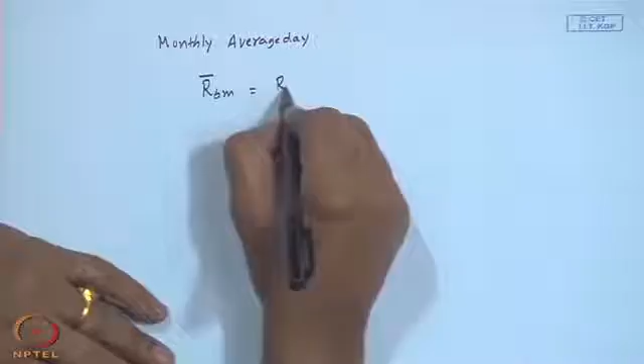As we have done for flat plate collectors or fixed slope surfaces, r b bar m for simplicity is nothing but r b bar evaluated with delta equal to delta mean, where delta mean is the recommended mean declination for each month. The formulas are known, and there are analytical expressions for modes 1, 4, and 5, while modes 2 and 3 are not analytically integrable.

So one may have to go for numerical integration, whether I b under terrestrial conditions is used or even under extraterrestrial conditions. Now the question comes: we have a parabola

with an aperture area A, focused onto a receiver of projected area AR, and the geometric concentration ratio is defined as AA upon AR.

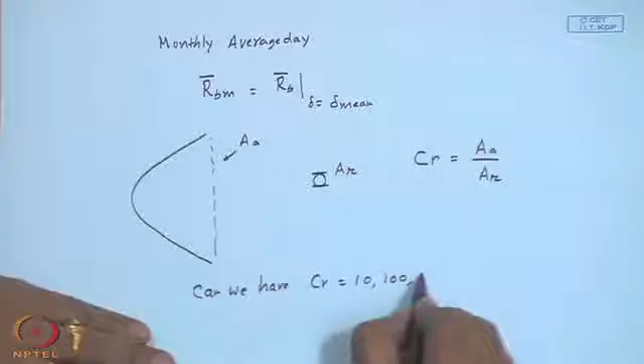Now can we have CR of 10? Maybe yes. 100? Yes. 1000? 10,000?

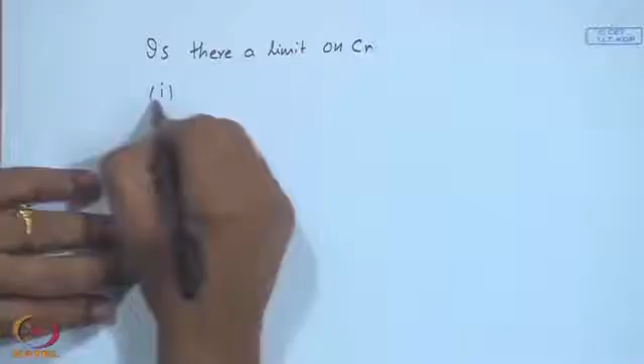Or is there a limit? Let me go to the next page. Is there a limit on CR? One, a theoretical limit. Second thing may be practical, arising due to manufacturing.

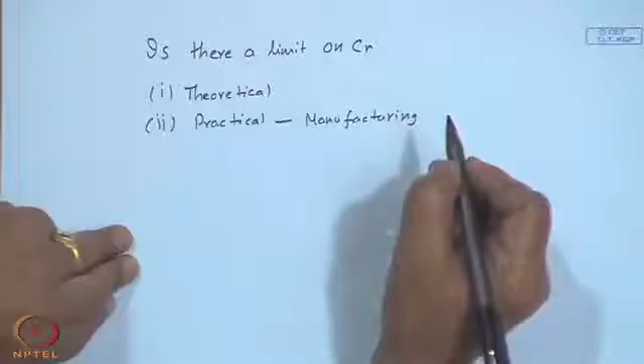For example, how perfect is the reflector, how perfect is the refractor, how perfect is the optics — and though we do not aim at 100% efficiency from the thermal point of view, will all the radiation passing through the aperture get reflected and go exactly onto the receiver, depending upon the tracking mode?

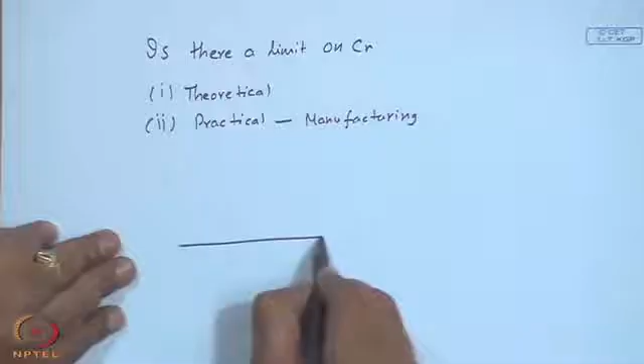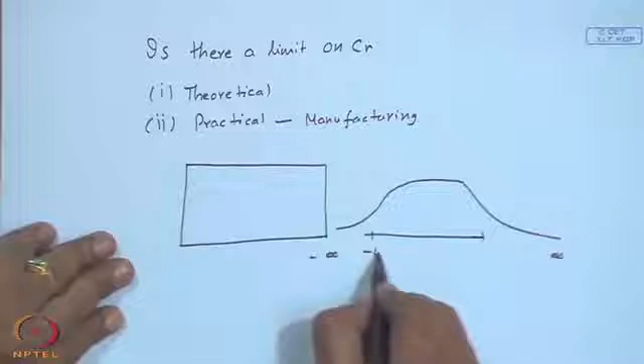So practically, if you take the plane of the receiver, my distribution will not be a perfect rectangle like this, but something like this, going well beyond the receiver. Technically I may have to integrate from minus infinity to plus infinity, whereas this may be from minus w by 2 to plus w by 2, and the intensity also may not be uniform. This is one aspect.

Regarding the reflected rays, whenever we show it as a cross section, this is the small receiver, classroom type, and this is the reflector coming over here. Now if I make it a two-dimensional view, this may be the reflector, and the tube may be here.

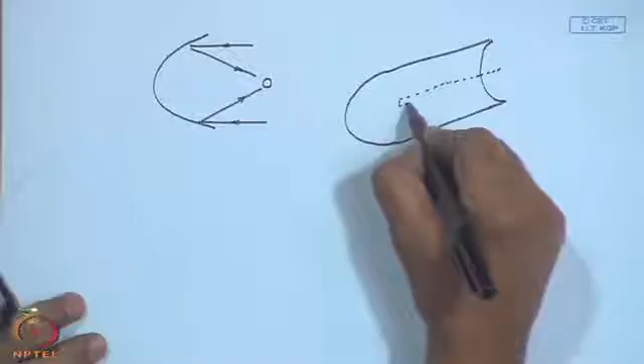Depending upon the tracking mode, my reflected rays may go to east or west, or north and south, and may not exactly fall on the receiver tube. So all that reflected radiation may not be captured by the receiver.

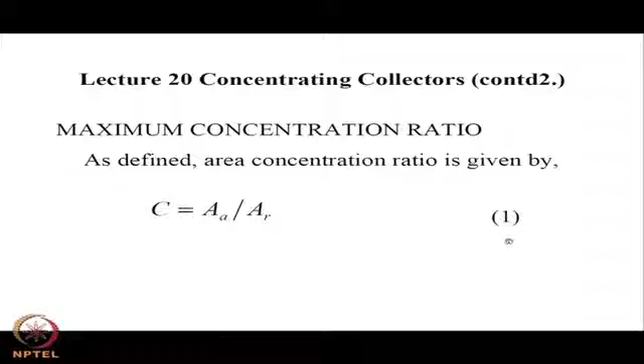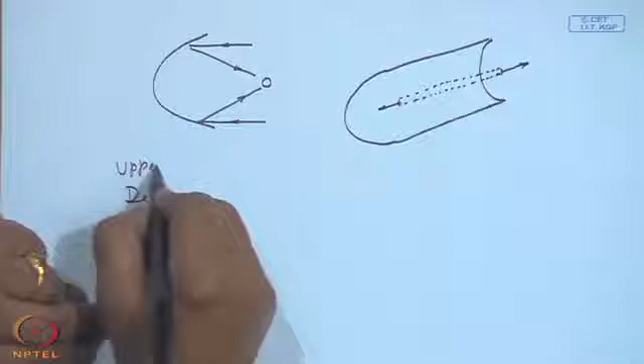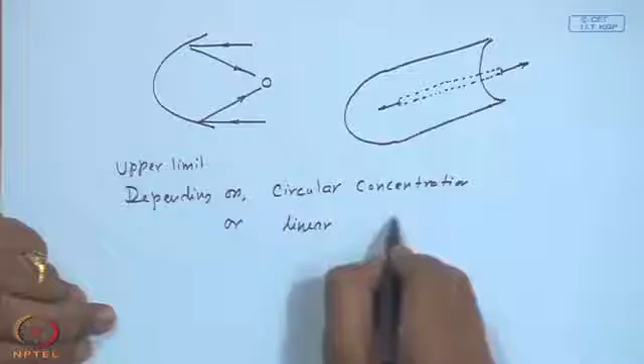So effectively the concentration ratio could be different. But even if we talk about only the theoretically possible maximum concentration ratio, this has an upper limit depending upon whether it is circular concentration or linear. So if you have a parabolic system

like we have drawn now, the attempt is to focus onto a line — this is a sort of linear concentrator. The other way around is, if you have a paraboloidal dish, this will try to focus onto a circular area.

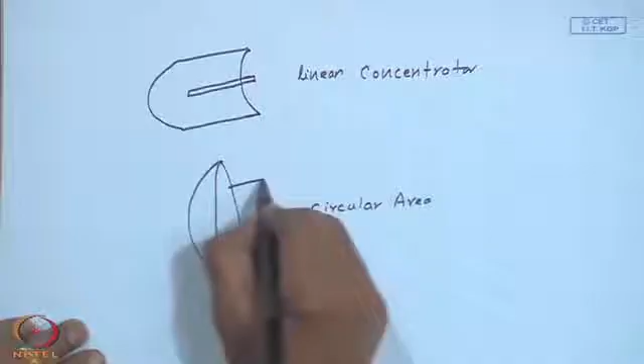So technically, can this be a point, can this be a line, or is it possible? So we shall show the possible maximum. Let this big circle be the sun, of radius r, at a distance capital R from the aperture area, and at the same distance the receiver also, making the half angle theta s.

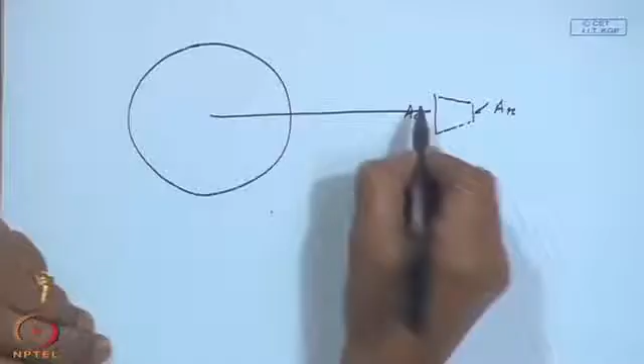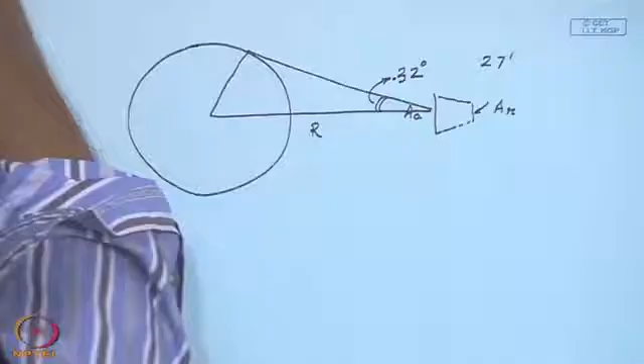Or 27 minutes. For a perfect concentrator, this is the sun of radius r at a distance from the earth of capital R, and the angle subtended is 0.32 degrees onto the aperture area AA, and AR is the receiver area. You do not have to worry whether this should be before or after — it is only a symbolic representation showing AA is not equal to AR, AR being the smaller one. The issue is, if we consider a circular concentrator, can we make AR almost zero, making the concentration ratio infinity?

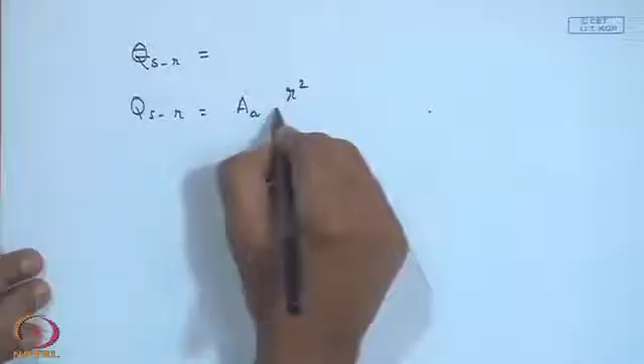So the radiation emitted by the sun reaching the receiver will be A a r-squared upon R-squared times sigma T s to the power 4, where r is the radius of the sun, capital R is the distance, sigma is the Stefan-Boltzmann constant, and T s is the effective temperature of the sun.

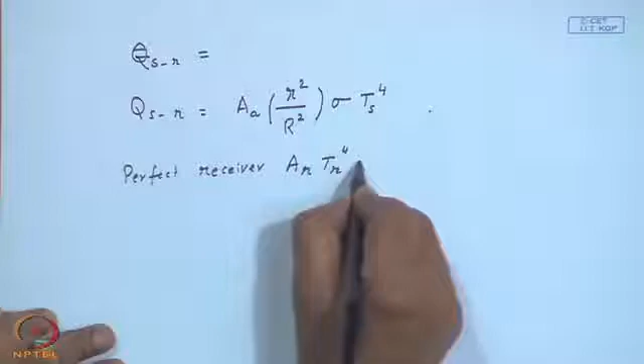A perfect receiver emits area AR into T r to the power 4 times the Stefan-Boltzmann constant sigma. Here you may be wondering — we are not really worried about the reflectivity etcetera. This is the radiation intercepted by the aperture; the same amount will reach, at maximum, the receiver.

A fraction of this energy will go from the receiver to the sun, because the receiver is small and the sun is big: Ar Tr to the power 4 into sigma, multiplied by the fraction Ers. So, this is the emitted energy at temperature Tr by the receiver, a fraction Ers of which will go back to the sun.

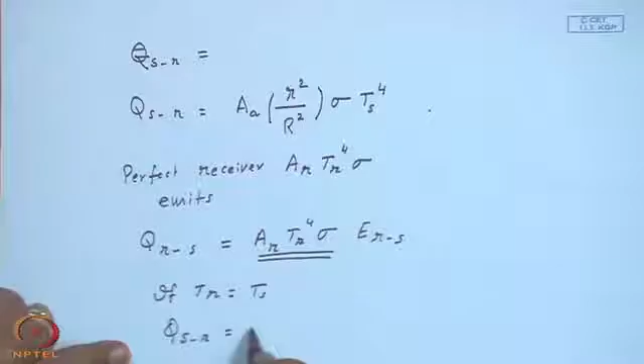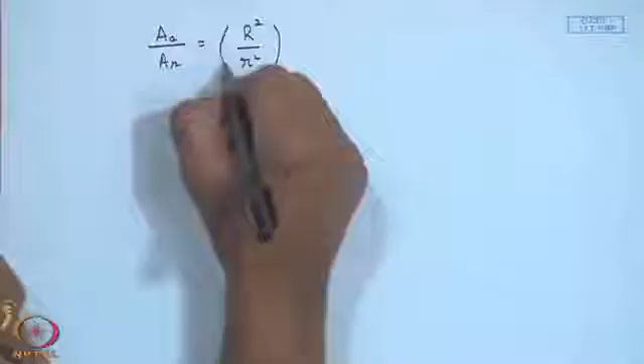Now, considering Tr and Ts: if Tr equals Ts, that means in principle if the receiver reaches the sun's temperature, my Qsr should be equal to Qrs. Since there is no more temperature change between Tr and Ts, the emitted radiation should be equal to the radiation received from the sun. So that gives us Aa by Ar equal to r square by r square times Ers.

Now, for the maximum value, we are estimating the theoretical maximum, so I can assume Ers equal to 1. So Aa by Ar maximum equals r square by r square, equal to 1 by sin squared theta s.

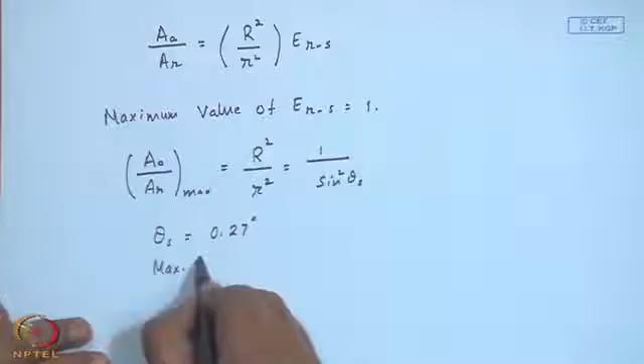So if theta s equals 0.27 degrees, the maximum possible concentration will be 212. If you put in the value of theta s, you will get 212. This is for a circular concentrator.

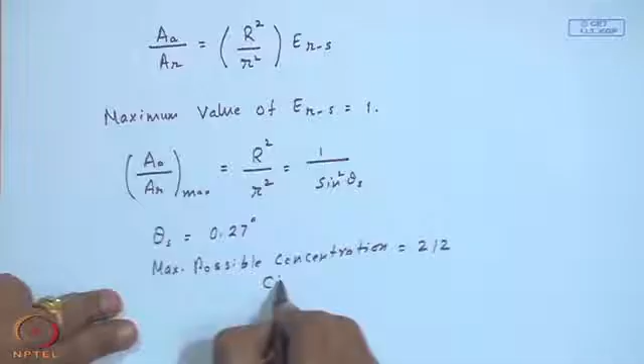So a similar procedure for concentration with circular concentrators, the maximum goes to 45,000.

Okay, I will just check these values in the next class. Because I think somewhere this linear and circular concentrators are getting confused. I will just check up these numbers.

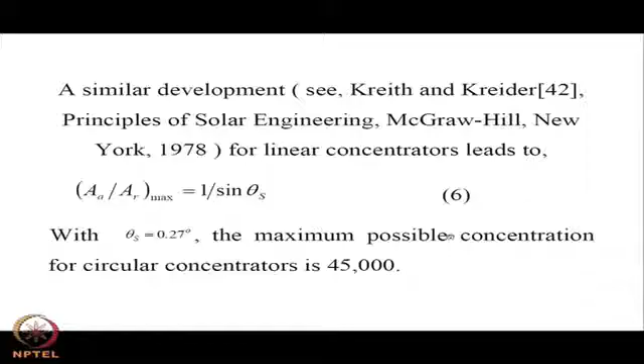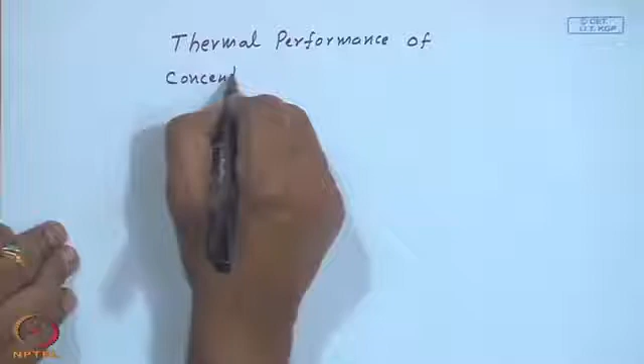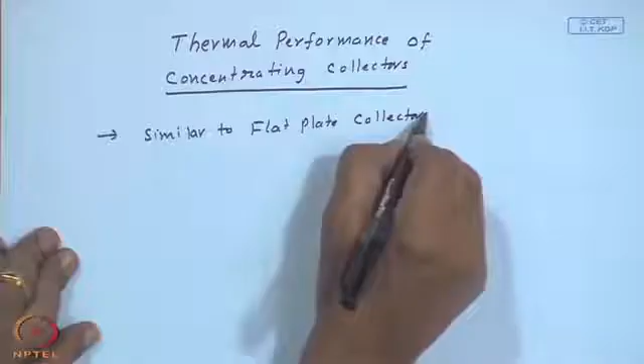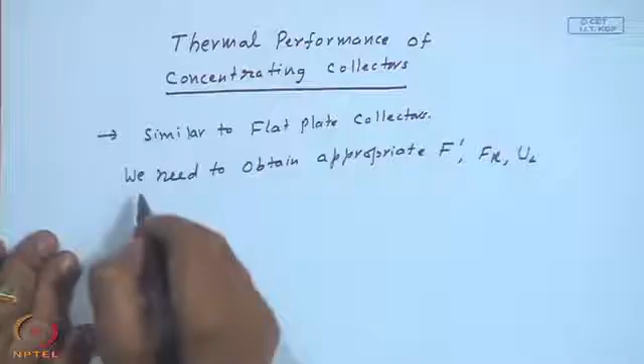Now we will go to thermal performance. This is of course similar to flat plate collectors that we have done, and we need to obtain the appropriate F dash, the collector efficiency factor, Fr the heat removal factor, UL the overall loss coefficient, and optical parameters.

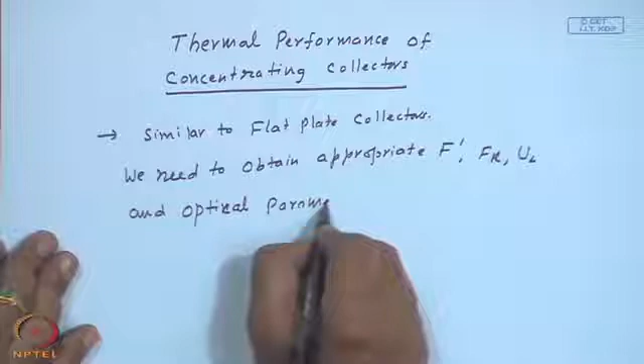Compared to a flat plate collector, if you have a concentrating reflector, there will be a reflectivity of the concentrating surface after the aperture. Then the receiver tube may be having a glass cover to reduce emitted and convective losses. So this will have a tau, there will be an alpha, and there will be a rho, the reflectivity of the surface. Instead of just tau into alpha, we have got a reflectivity of the reflector, or refractive index in the case of a refractor, and the transmittance of the outer glass cover surrounding the tube, and the absorptivity alpha.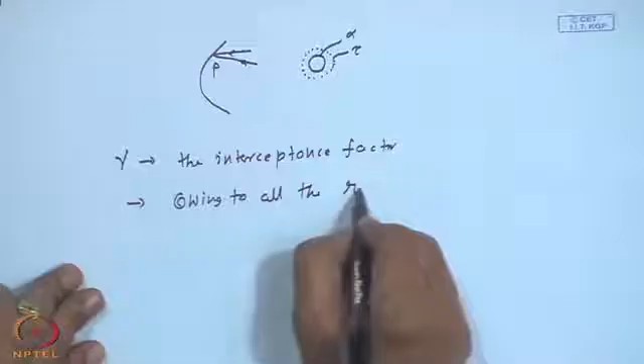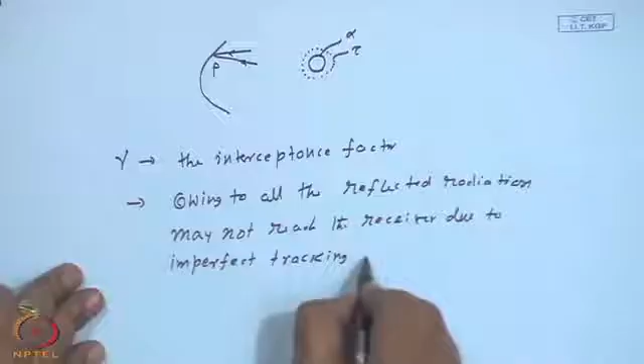There is another additional parameter, gamma, the interceptance factor. This arises owing to all the reflected radiation possibly not reaching the receiver, due to imperfect tracking or geometric faults and non-specular reflection.

What we mean is this imperfect tracking includes my tracking not being two-axis all the time. If you have single axis tracking like the first mode, the reflected radiation may not always be within the length of the receiver tube. But it is often argued that if you don't consider a single collector but a large number of concentrators one after the other, the tube is long enough so that the reflected radiation will reach the tube somewhere, maybe that of the adjacent collector.

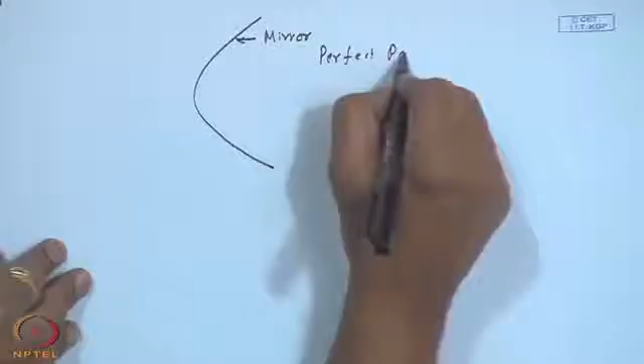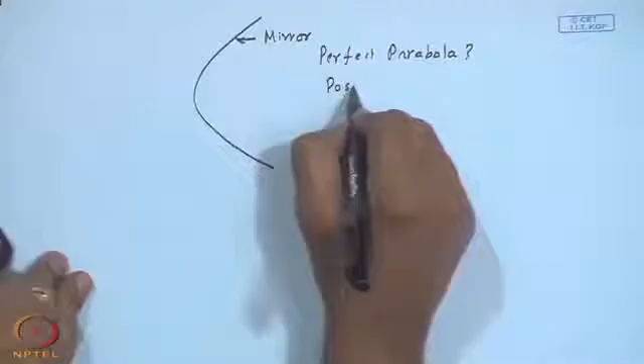Nevertheless, part of it may be lit and part of it may not be, and depending upon your manufacturing technique, the mirror may not be a perfect parabola. Consequently, there will be some undulations because it is a large surface, so all the reflected radiation may not strike the receiver. Then the position of the receiver itself may have imperfections, but most of it is due to the tracking not being perfect and the large manufactured reflecting surface not following exactly the parabola that optics requires.

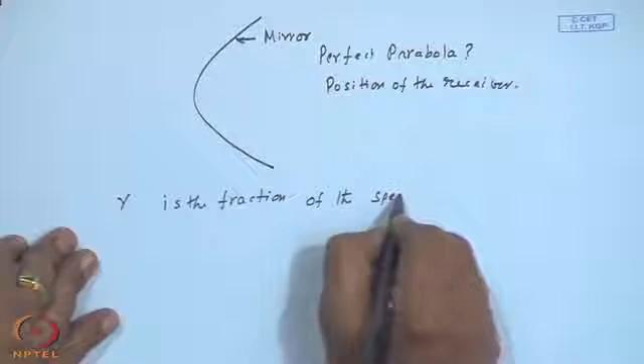So you may define gamma, the interceptance fraction factor, as the fraction of the specularly reflected radiation intercepted by the receiver tube.

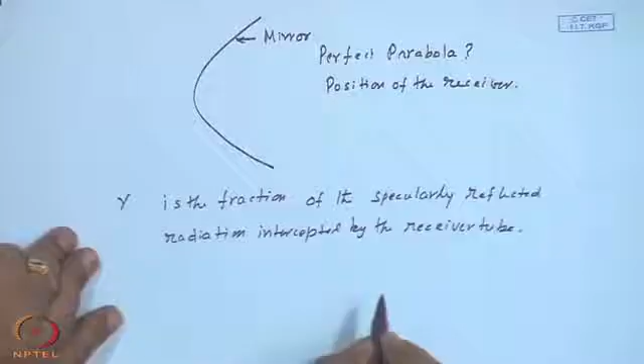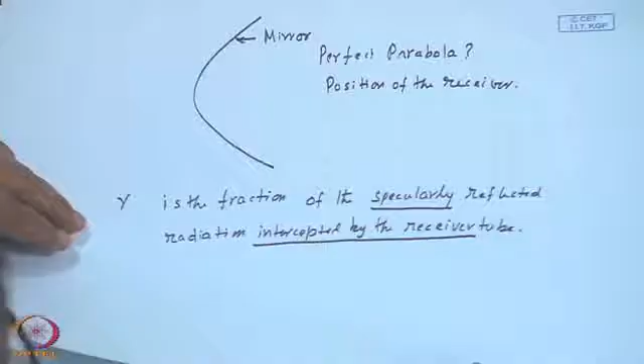So please note it should be specular and it should be intercepted by the receiver. Non-specular will not reach the receiver, at least we cannot assure that, either because of imperfect specular reflection or imperfect position of the receiver. All the radiation reflected from the mirror may not reach the receiver.

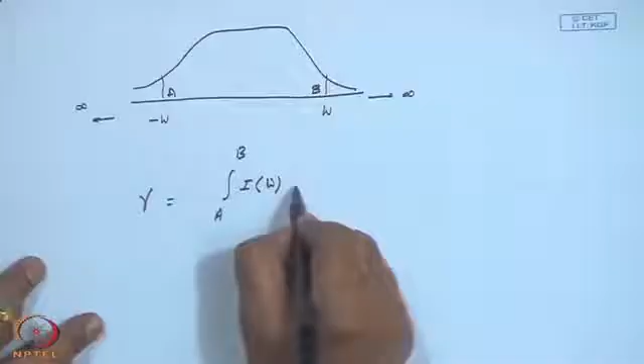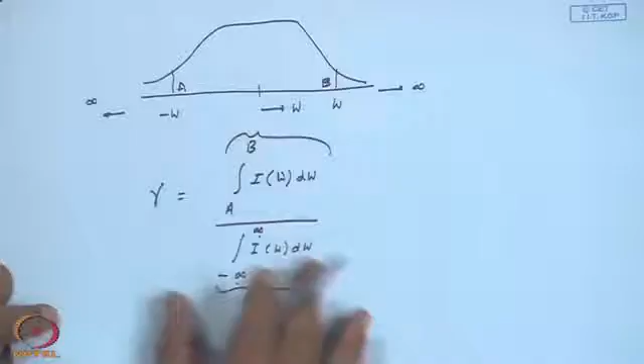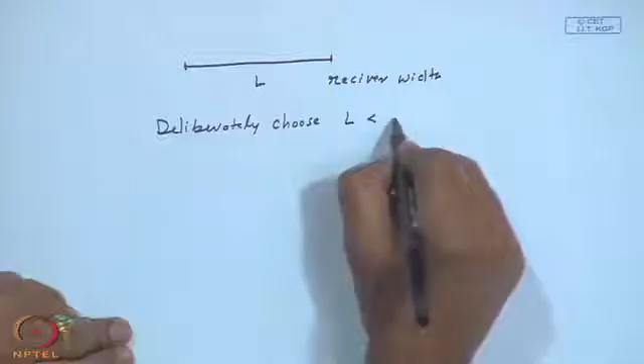Now some clarification is required. Instead of that, if I have got some L as the receiver width, we may deliberately choose L less than what is needed to capture the reflected radiation.

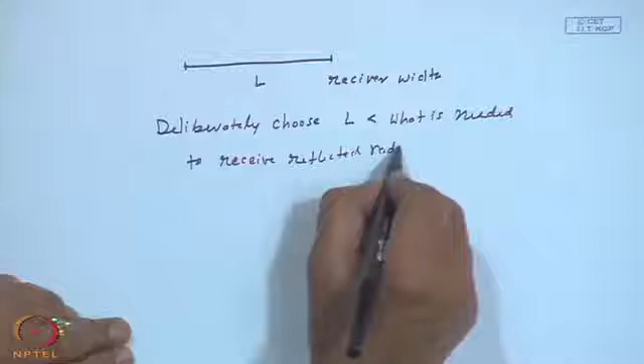Because if you see the type of distribution that we are having over here, 90% of it may be in this region. So if I add this much and this much, I will be having a larger area for the heat losses to take place, though the absorbed or reflected radiation is relatively a small portion. So we may deliberately truncate the receiver width to a certain value.

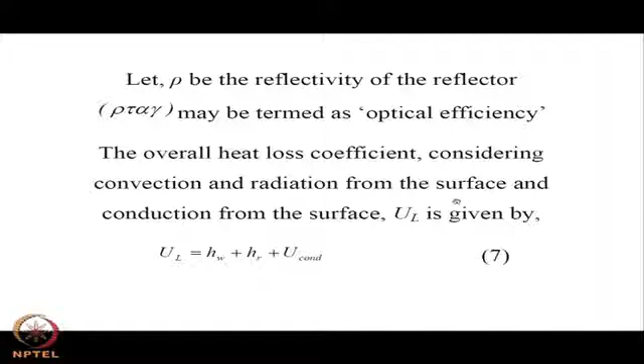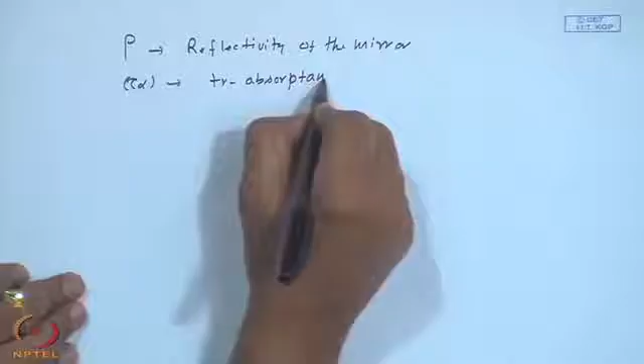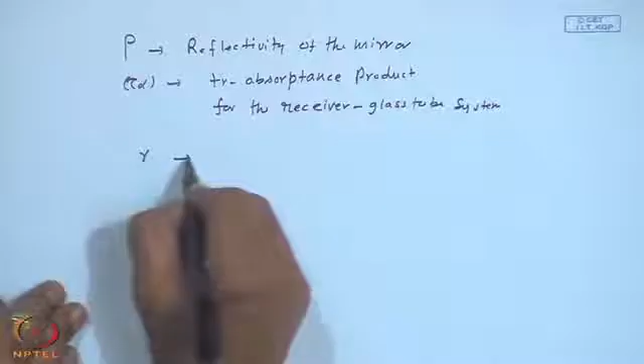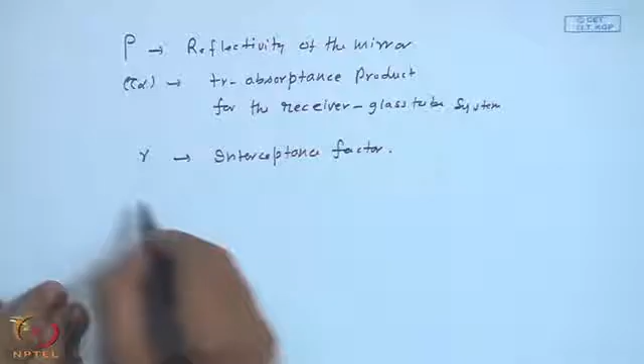If rho is the reflectivity of the mirror, and tau alpha the transmittance-absorptance product for the receiver glass tube system, and gamma is the interceptance factor, then you have a total rho tau alpha gamma effective, which is the sort of optical efficiency.

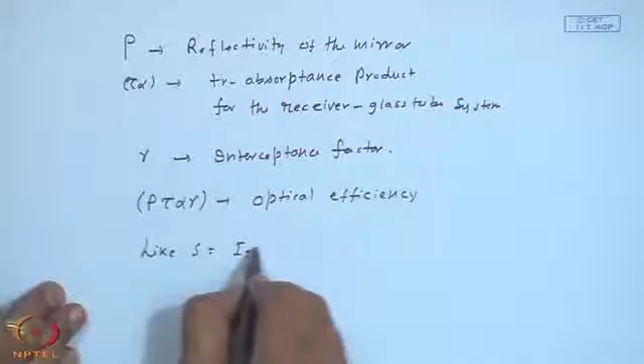Like S equal to I t tau alpha for flat plate collectors, we may have S is equal to I t A times rho tau alpha gamma for the concentrators. Of course, if you do not have a glass cover, then this tau will be equal to 1.

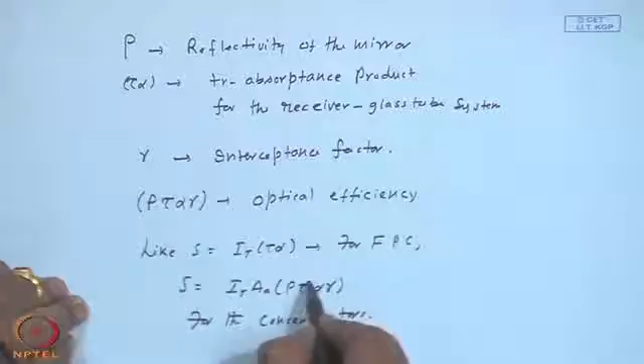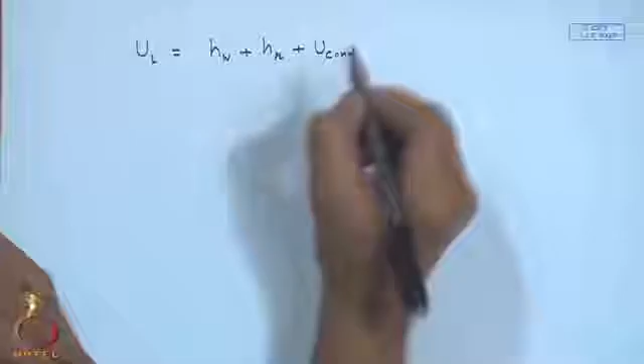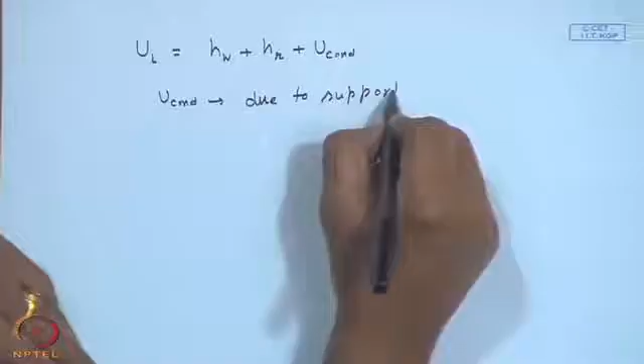Then the overall loss coefficient should be comprising of a wind loss coefficient from the receiver, plus a radiative loss coefficient from the receiver, plus a U conduction. This is due to support structure for the receiver tube.

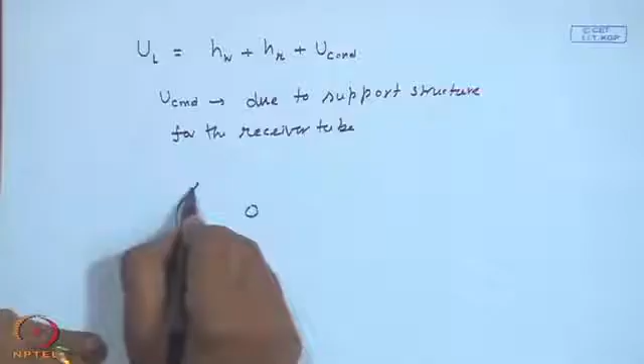Because, like we have been showing schematically, the receiver tube will not be just hanging in air, and there may have to be supports with respect to the receiver or this reflector or a frame. With that, they may act like some sort of fins added to the receiver tube, and hence there may be loss. So my overall loss coefficient will comprise of the wind loss coefficient, a radiative loss coefficient, and the conduction loss due to the support structure.

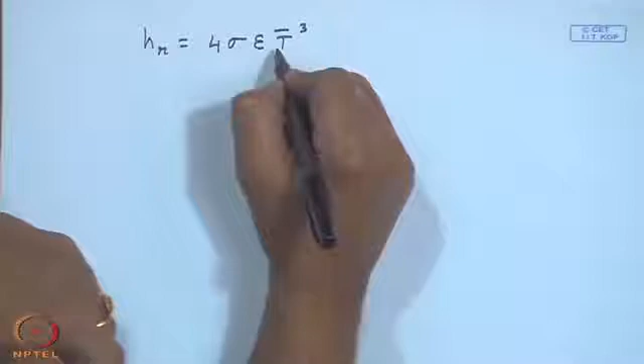And this is, of course, we can express the radiative heat transfer coefficient in terms of 4 sigma epsilon T bar to the power 3, where, as we have already defined, it is an average temperature of the receiver T r and the surrounding ambient temperature T a, in terms of the 4th powers.

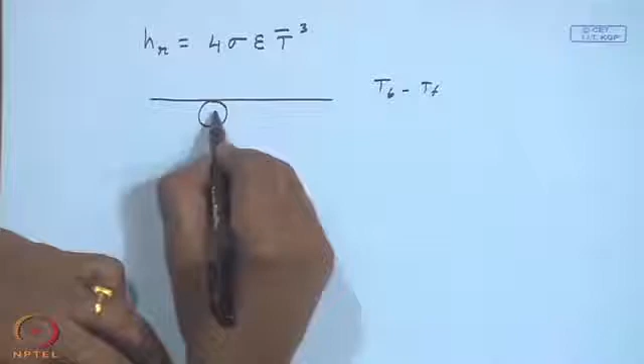The heat flux in a concentrating system is higher, so the heat transfer resistance from the outer surface of the receiving tube to the fluid should include the tube wall. If you recall, in our flat plate analysis, T b minus T f has been expressed only in terms of heat transfer resistance inside and the bond conductance or the resistance due to the bond, but the thermal conductivity of the material or the pipe has not been included, resistance due to the material has not been included.

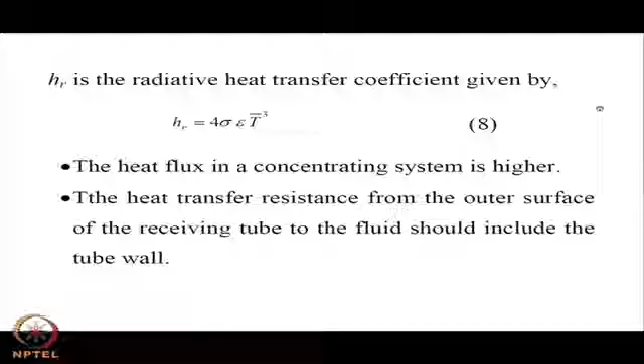But now my fluxes are larger, which calls for including the tube resistance also. So now we can write down a U naught, which you know already. I will tell you after writing down this expression.

This is the resistance between the receiver and the ambient, so this overall thing is the resistance between the fluid in the tube and the ambient. That comprises the convective resistance inside the tube and the conduction resistance in the material of the tube of thermal conductivity K. This is what we have not included in FPC.

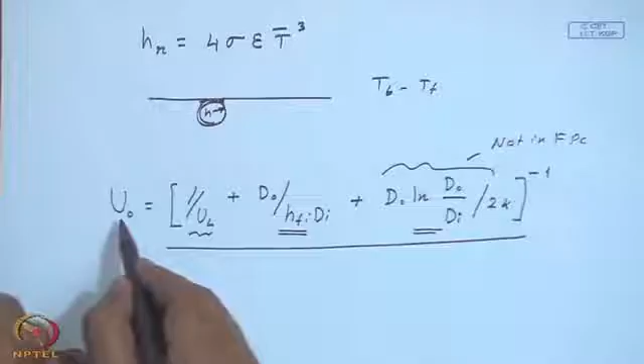So this is the resistance, 1 upon UL. Basically it's the resistance from the fluid to the ambient, and this is the resistance from the receiver tube to the ambient. In fact, F dashed we have defined as 1 upon UL upon 1 upon U naught, which will be useful in calculating your collector efficiency factor also.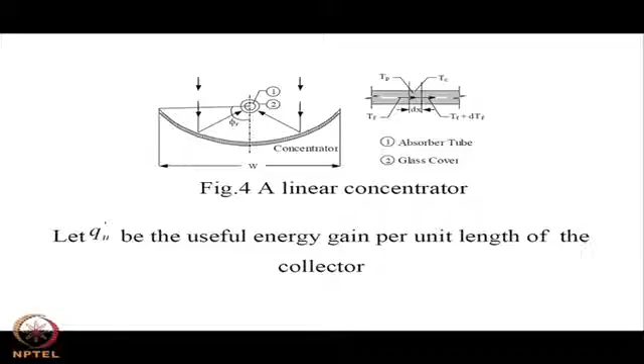So if we try to make a thermal analysis for the linear concentrator, for ease of representation I will show it horizontally.

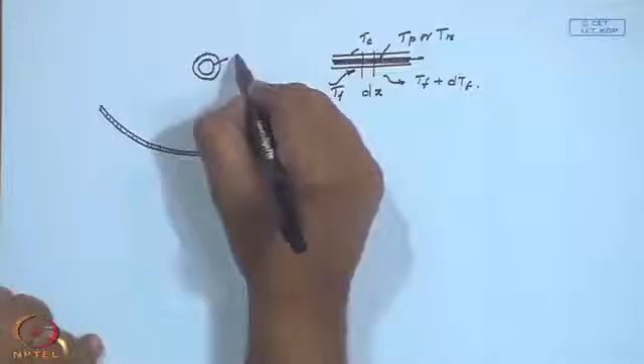This is exactly similar to what we had done for flat plate collectors. This is 1, this is 2. So there is a glass cover, one is the absorber tube, and 2 is the glass cover.

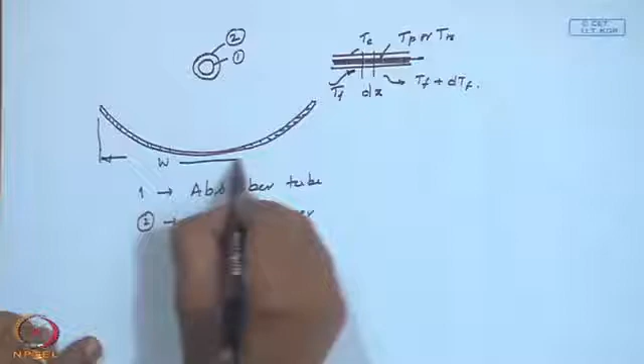Let the width of this be W. We may have a length L perpendicular to the plane of the paper.

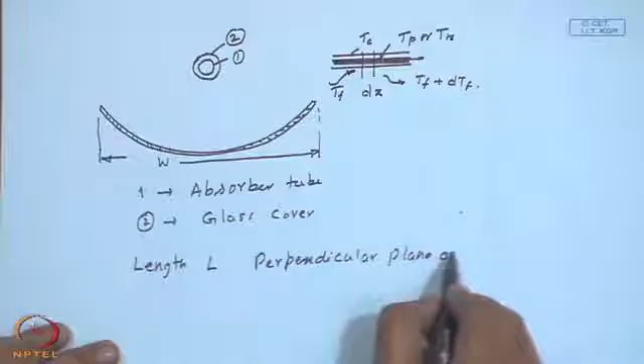So now we have a reflector of width W, length perpendicular to the plane of the paper L, through which a fluid is flowing across an elemental length of dx. The temperature of the fluid increases from Tf to Tf plus dTf, and the receiver tube is at Tr, or Tp in your flat plate terminology, and the outer cover is at a temperature Tc.

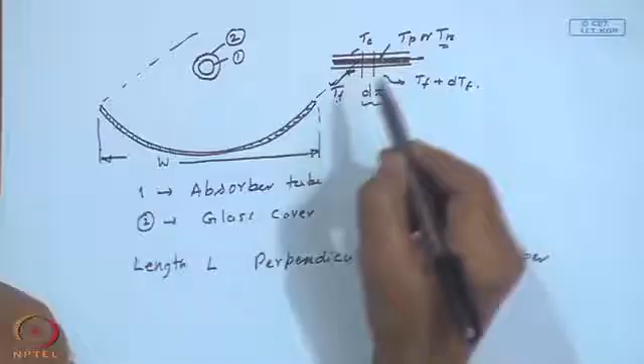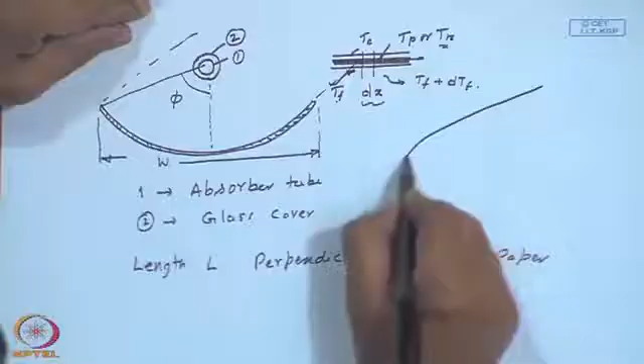And with respect to the axis, this is some sort of an angle phi, which indicates how big is the parabola. The parabola technically can go on up to any extent.

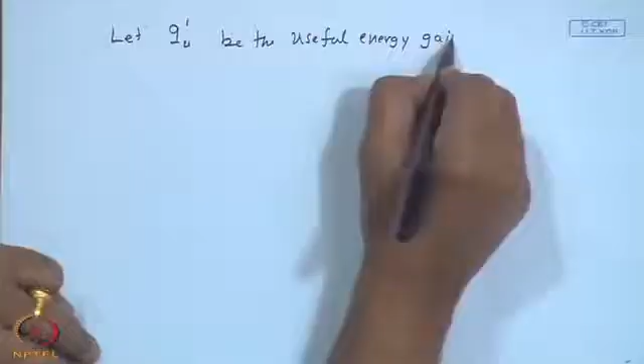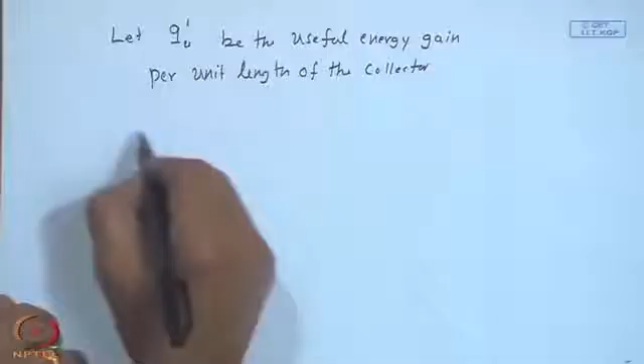So now let Qu dashed be the useful energy gain per unit length of the collector, that perpendicular to the plane of the paper L, for 1 unit length we are considering. This Qu dashed will be...

A times S by L minus AR UL by L into TR minus TA. So this A will be: A times W will be there, into L will be there, W will be there, L will be there, or accordingly appropriately that is included in this. This is, in fact, if L is not there, it would have been the total energy gain based upon the area, absorbed energy, and the loss based upon the receiver area.

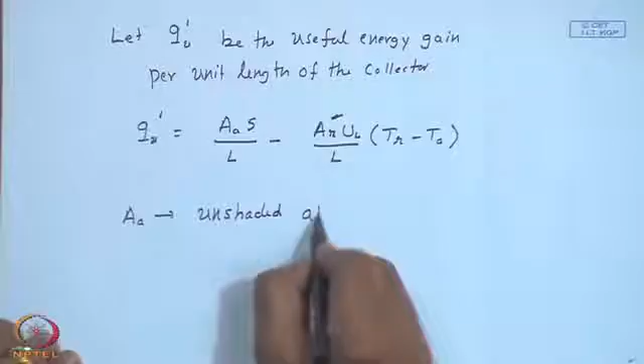So A can be considered as unshaded aperture area. For more accuracy, what we do is we consider that the receiver tube may cast a shadow on the aperture plane or obstruct the solar radiation entering through the aperture. There is no shadow because the aperture plane is only an imaginary line, there is no physical plane present over there. AR is the receiver area.

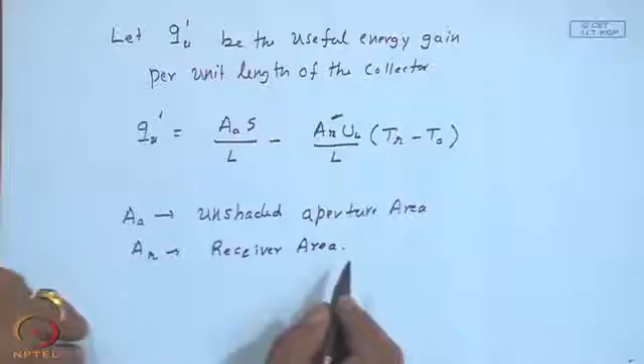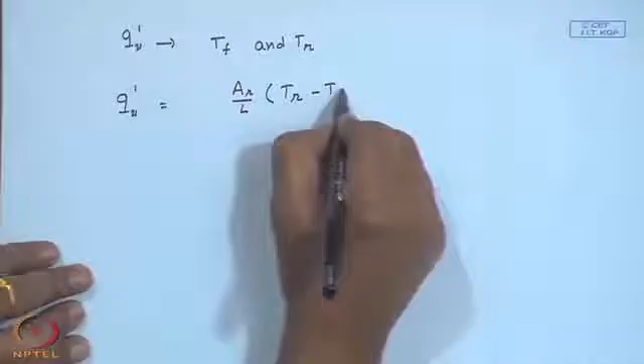It is just like the energy balance we have done, and Qu dashed can be written in terms of the local fluid temperature Tf and Tr. So Qu dashed will be AR by L into Tr minus Tf by, d naught by hf i d i plus d naught by 2k log d naught by d i.

You will find that this is the temperature difference available between the receiver and the fluid of area AR per unit length, and this is the resistance for the convection inside the tube, and this is the resistance due to the wall of the tube.

So Qu dashed, as we commonly express, equals F dashed times A, the area of the aperture per unit length, times absorbed energy, minus A by AR times UL times Tf minus Ta.

This should be AR by Aa, otherwise it will lose more heat. So now if you compare these equations, F dashed will be given by 1 upon UL, by 1 upon UL plus d naught...